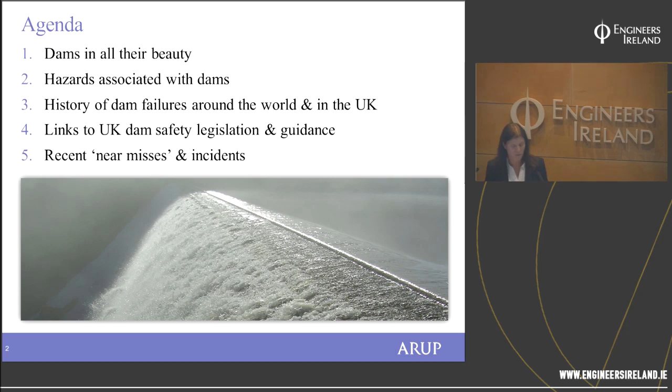So here, as I said, some of the beautiful dams - the dams that you see on a sunny day. When you see these sort of dams and you're inspecting them as a dam engineer, it makes you realise why you do the job, and it certainly is a job that I enjoy on a day like this. This is a dam in Wales that we've recently worked on and stabilised the tower, and a couple of dams in the Elan Valley. I personally think these are the most beautiful dams in the world - I may be biased, these are in the Welsh mountains, but they are certainly spectacular and beautiful dams.

So let's get into the less positive side of dams. Dams by their very nature are hazardous, they pose a threat. There are many ways that a dam may fail, or certainly start the process towards failure. Some of the most prevalent failure modes are overtopping, internal erosion, and instability. Certainly in the UK, overtopping and internal erosion probably account for about a third each of the dam failures, and you can see from my diagrams here the different ways that the failures can occur.

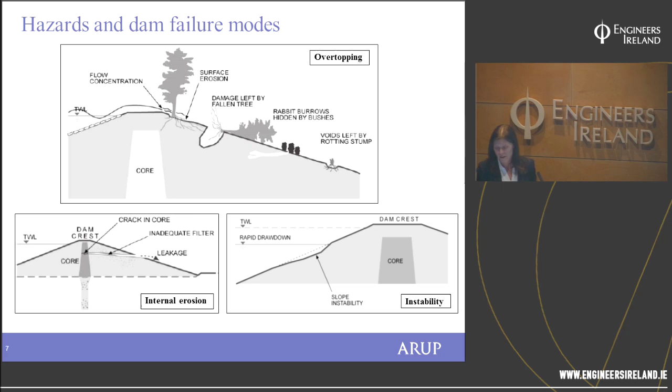With instability, there are many ways that a slope may fail. One shown on the diagram here is rapid drawdown - if you lower your reservoir too quickly, you can cause the upstream slope to fail. These are just a few of the different failure modes for embankment dams, and this is showing some of the failure modes for concrete and masonry dams, where you can get open joints in the foundations, and where your foundations aren't deep enough or there's too much uplift pressure, you may get a failure of a concrete dam.

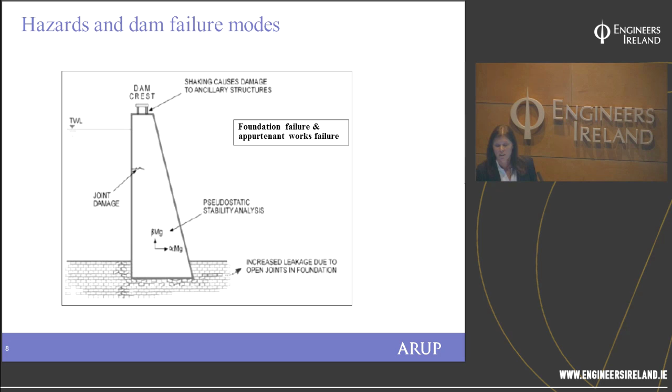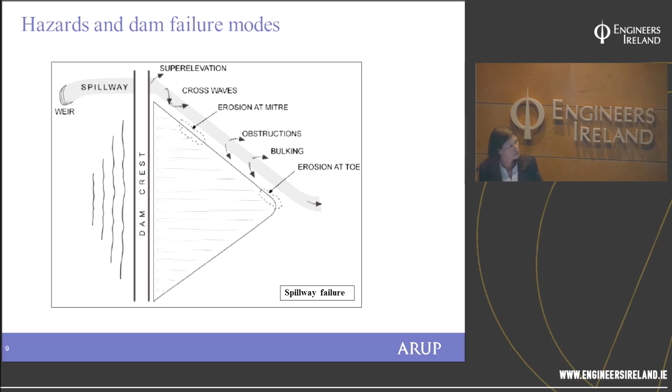And then, of course, there's the topic of my conversation later on this evening, spillway failures. With spillways, if the capacity isn't large enough to take a flood, it may overtop, and if it's close to the dam, this will cause erosion of the dam. I won't talk much more about that, as we'll cover it later.

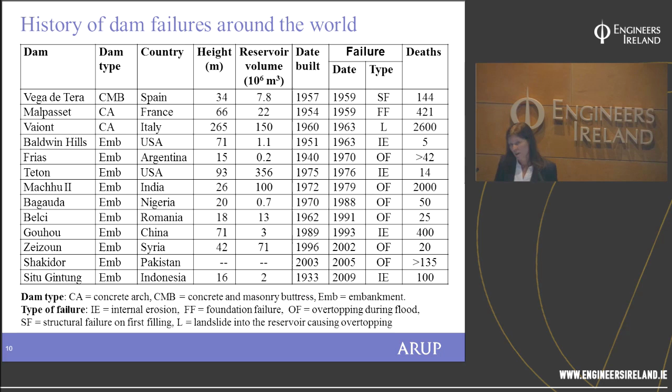Sorry, a very big table here. I'm not expecting you to take all of this in, but this is just a few of the dam failures around the world that have caused deaths and quite devastating destruction downstream when they failed. There's a couple here I'm going to talk about. You'll note Malpasset, where 421 people were killed, and Vaiont in Italy, where a horrendous catastrophe killed 2,600 people. So when a dam fails, it really is quite devastating.

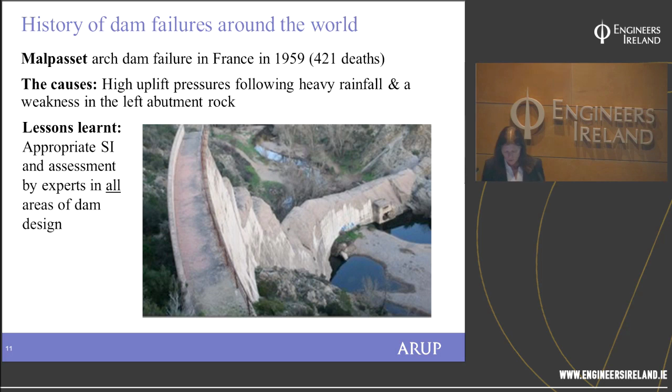This is a picture of Malpasset in France. As I said, this one killed 421 people when it failed. The causes were that this is a concrete dam, and the uplift pressures were very high during heavy rainfall, and there was a weakness in the left abutment in the rock. The key lessons learnt are that it's absolutely essential, when doing dam design, to undertake really thorough site investigation and to have experts from various disciplines working on the designs - geotechnical, hydraulic, hydrologists. One dam engineer is not an expert in all things, so it's really important to ensure everyone inputs from their specialist background.

Another very catastrophic failure was Vaiont Dam. You can see the dam down here in the valley - it's a very narrow valley, a nearly 300 metre high concrete dam. This one failed when the hillside on this side, where you can see a smooth slope, the whole hillside collapsed into the reservoir and displaced it, causing a 125 metre wave to come over the top of the dam. The dam didn't fail, as you can see it still stands today, but the reservoir overtopped and was funneled down a very narrow valley into villages below, absolutely devastating and demolishing many of the houses.

Lessons learnt from this one: although there was lots of instrumentation and surveillance on this dam, it was noted that this was a very deep-seated slip, and that the pore water pressures and the movements needed to be measured at depth as well as on the surface.

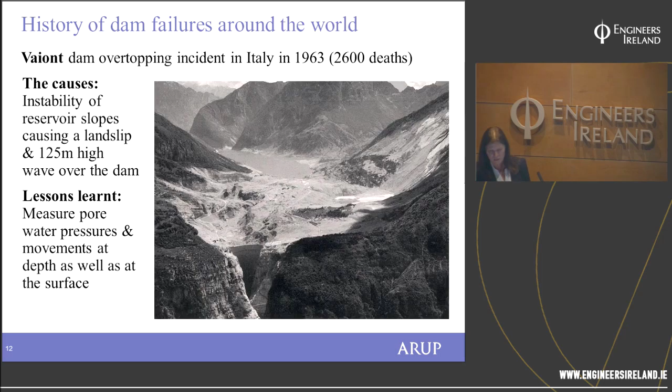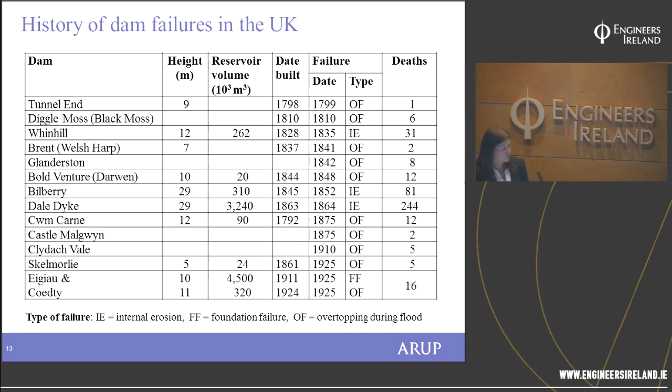Here's a few of the dam failures in the UK. There's a variety here, but one you may have heard of in particular was Dale Dyke, in the centre. This has just recently had its 150th year anniversary, and was probably the worst disaster we had in the UK, where 244 people were killed. You can see the last time we actually had a dam failure causing loss of life was back in 1925. This is Dale Dyke - it was an earth embankment dam.

The cause for this one was never absolutely confirmed, but the most likely theory was hydraulic fracture of the core. It was a very thin core with non-cohesive material on the shoulders adjacent to the core. The lessons learnt were to ensure a wide enough core with well compacted fill on either side. Another concern was the fact that there were tunnels and pipes through the dam, so the lesson was, where feasible, to place pipes in tunnels through the natural ground.

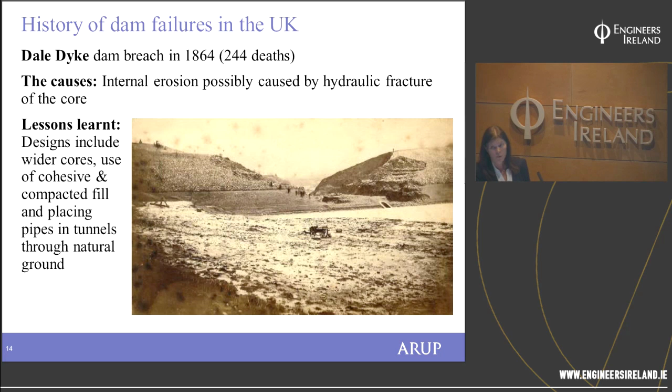As a result of these disasters, when things go wrong, we learn the lessons, and the important thing is to ensure we improve our designs and understanding, and feed these into future dam designs. As a result of Dale Dyke, specifications became common practice for fill to be worked and compacted in thinner layers - 9 inches, or 0.23 metres. This is also where tunnels started being driven through natural ground. Another lesson is that when you have a pressurised pipe through a dam, it's best practice to install an upstream valve, so you can close it and have a non-pressurised pipe through the dam - meaning if it did burst, it would not cause erosion of the dam.

Other incidents continued through the 1870s, with instances of dams leaking in the foundations as well as through the dam. This is where common practice started to have cut-off trenches below dams, and they also started to grout the foundations to seal any joints.

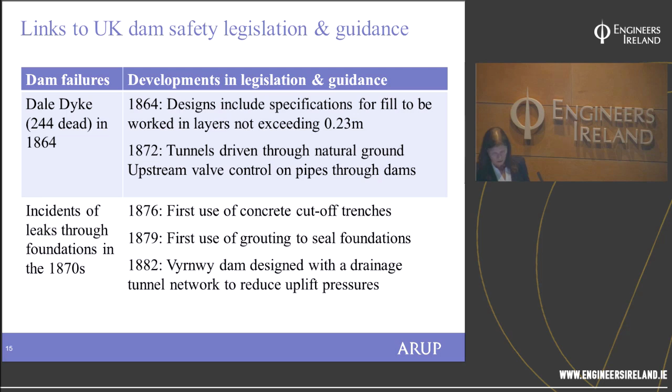This is also where dams started to have drainage installed to collect the seepage and take it safely away from the dam, and to reduce uplift pressures.

This is the last dam failure that caused deaths. These are two dams located in North Wales. Eigiau is a concrete dam which suffered a foundation failure - it was found the foundation wasn't deep enough, and its foundations burst.

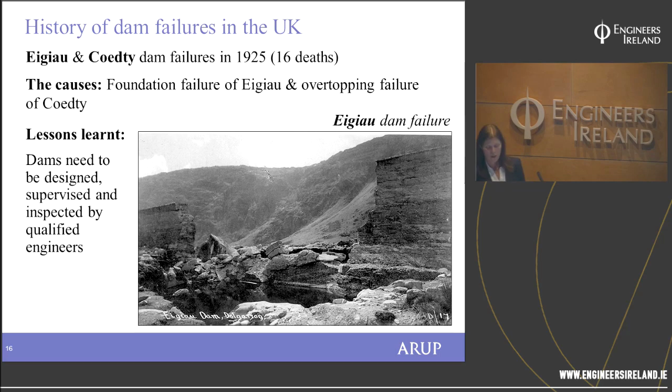The reservoir cascaded into the Coedty Dam just downstream. Coedty is an earth embankment with a concrete wall, and the fill is pretty loose material. When the Eigiau reservoir flowed into Coedty, it overtopped and eroded the downstream shoulder, and the dam collapsed, flooding downstream into the town of Dolgarrog. You can see the devastation caused just downstream.

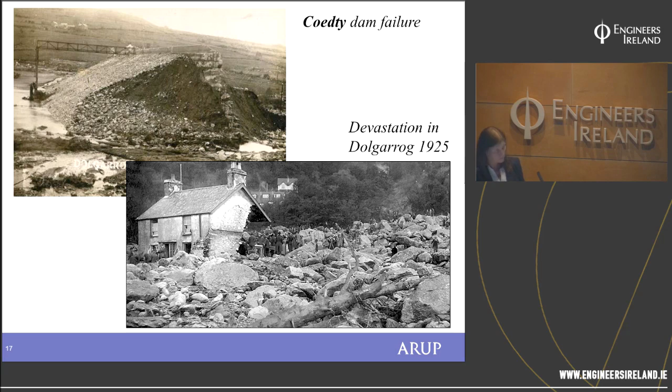After those disasters in the 1920s, the 1930 Reservoirs Act was the first piece of legislation passed to improve dam safety in the UK. That legislation required a mandatory inspection by a qualified engineer. That was as far as it went in the 1930s.

From there, there continued to be near misses, and there were major slips on three dams in 1937. A lot of that was due to improved plant and equipment enabling construction to be much faster, which had the result of increasing pore pressures, causing instability and slips in dams.

As time went on, soil mechanics became more widely used in designs, and berms were used to ensure dams were more stable. There was also wider use of drainage blankets and instrumentation to monitor pore pressures in dams.

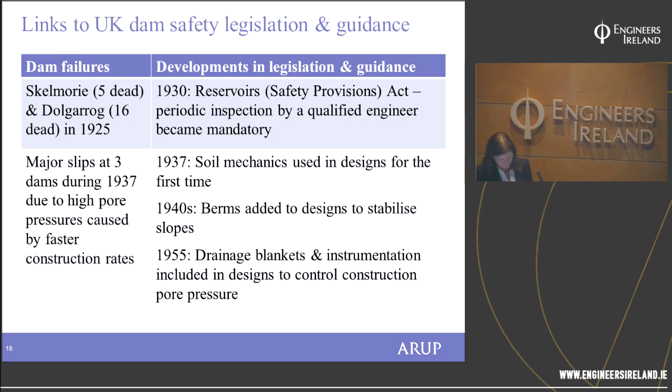However, even though there's been no loss of life in the UK since 1925, there have still been many near misses and dam failures. The average age of dams is now 115 years and growing, and there's always the question of how much longer these dams can continue. With extremes of weather and dams aging every year, the question is how much longer they will continue.

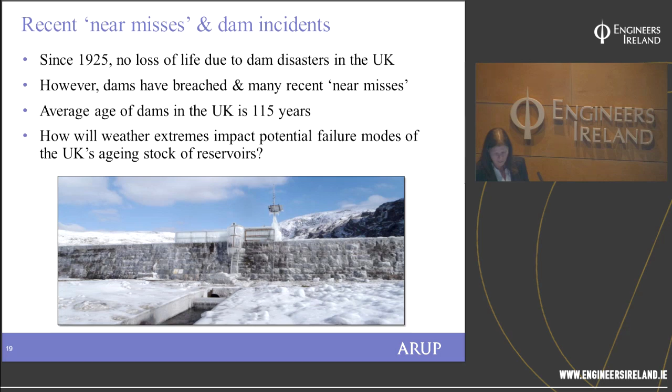This is a picture of Warmwithens in the 1970s, which failed. It had been perfectly stable for over 100 years. Then a tunnel was installed within the dam, which changed the whole behaviour of the dam. There was leakage along the line of the tunnel, and it eventually burst, as you can see. The lesson learnt is that when working on existing dams, it's really important to fully understand how remedial works can change the stresses and strains within a dam.

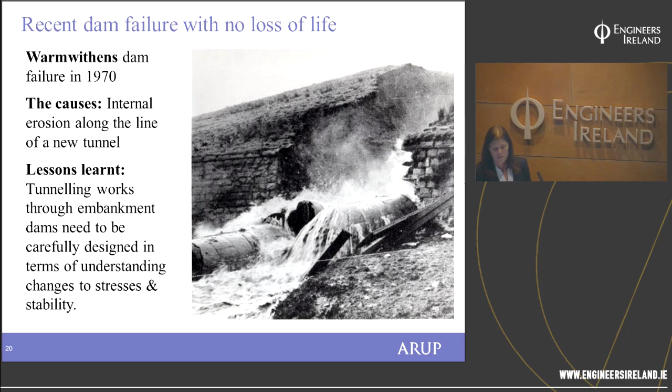As a result of Warmwithens and other incidents, the 1975 Reservoirs Act was passed, applicable to England and Wales, and various publications about managing dams during floods and other guides were published to assist with improving dam safety.

The 1975 Act was actually implemented in '86 following another dam failure, Carsington Dam, which brought in new roles for enforcement and supervision, with undertakers also having a role to play.

This is when supervising engineers inspected reservoirs twice a year, and all reservoir panel engineers inspected reservoirs every 10 years as a minimum. If this wasn't undertaken, enforcement action ensured it happened. There were other publications as well.

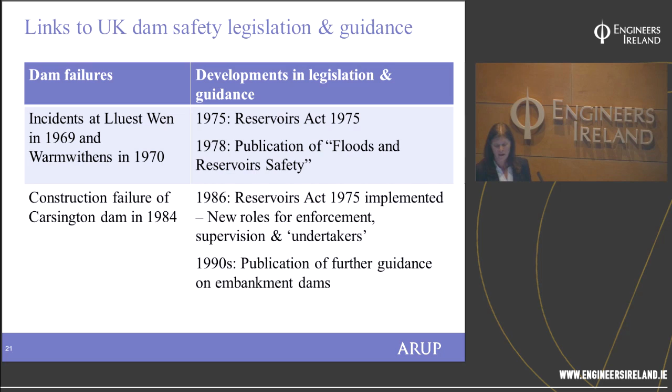This spillway was actually lower than a more modern, wider spillway, and it came into action first when the floods came in. It came into flow and was overwhelmed, causing turbulence within the channel which plucked out the masonry stones, and the walls collapsed. The dam, right adjacent, started to erode as a result.

If action hadn't been taken, the erosion would have worked backwards until the dam actually failed. This was widely publicised because just downstream there was a motorway, a very large gas pipe, and a lot of residential areas. So the residents were evacuated, and the area was put under a no-fly zone because if the dam had failed and the gas pipe had blown, it could have taken out any aircraft in the area. The motorway was closed, so it had a significant impact.

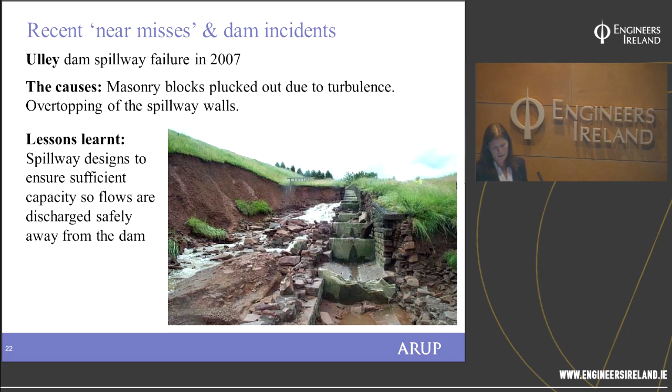They did manage to stem the erosion using excavators and fill to plug up the hole, whilst pumping out the water, and managed to get the reservoir down enough to prevent failure. So it was a fortunate and successful incident management, but it could have been very catastrophic if they hadn't caught it in time.

So after Ulley wasn't the only one - there was also a near miss at Boltby Dam where the spillway failed. Following these incidents and flooding generally across the UK, there was the Pitt Report, which recommended new legislation, and that's when the 2010 Floods and Water Management Act was passed. There was a section on reservoirs, bringing in new risk-based guidance and recommendations, one being to regulate smaller reservoirs, which has recently been implemented in Wales.

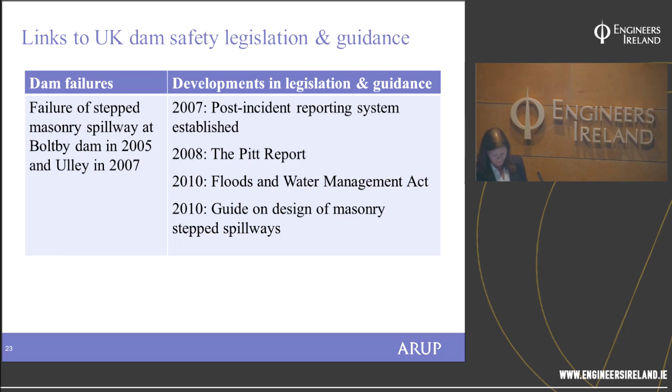For the next part of my lecture, I'd like to talk about two incidents. As I said, this is an incident in Wales when I was with Welsh Water as the dam safety manager, and Welsh Water has kindly given me permission to show you this incident and how they managed it.

This is an earth embankment dam in South Wales. Over the winter of 2012-2013 there was consistent, continuous flooding - no big extreme storms, but lots of small flood events coming through. The reservoir had been on flow for 3 or 4 months continuously, and there was water everywhere, under and all around, with the whole embankment very saturated.

Then it was early January when better weather came in and the reservoir came off flow. As it did, our reservoir keeper went up on his normal routine inspection and saw this. I was in a meeting at the time and my phone kept ringing, so I thought I'd better take it. My engineer said I think you need to look at the photographs I've just sent you - and this is what he showed me. As soon as I saw them, we kicked into action.

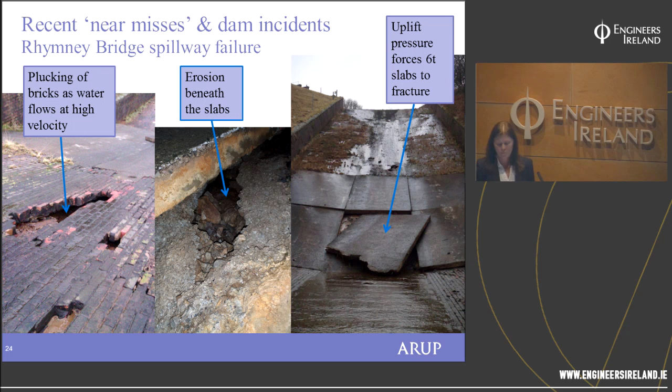The issue was we're in the middle of winter, and if that reservoir overflowed again we could lose more of the spillway to the point where it unravels and starts eroding the dam itself, right adjacent to it. So we immediately started work repairing the spillway, but we were at high altitude with extremely difficult weather conditions - this was now end of January and we had an unprecedented amount of snow. We used a system called bronze, silver and gold.

Depending on the level of the incident, bronze is a local event, silver is a regional event, and gold is your highest level event. So we declared a gold incident, and we had our highest level people in our gold command, in our room in Cardiff, away from the site.

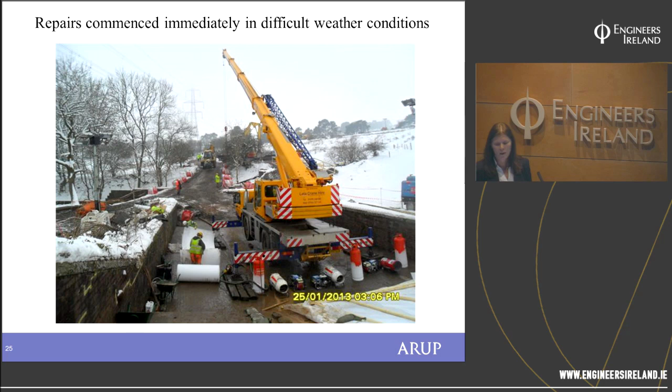So I was sat in gold command for 6 weeks while this was going on, and we were continuously watching the weather forecast and planning for the worst. This was them working away. They had to install concrete in this weather, so we had blankets and hot air blowers and everything going, and quickset concrete to try to enable us to make these repairs. But it was slow going. We were working 24/7.

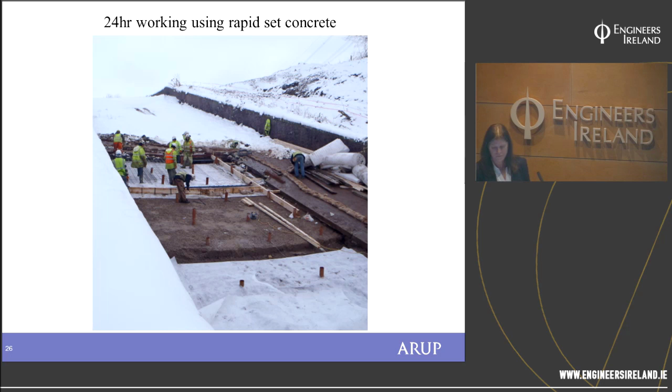We had high volume pumps, the biggest pumps you can find in the UK. They're the ones that the emergency services have, and we managed to find 4 in the whole of the country. We got these to site, and they were going full bore all the time, trying to keep the reservoir down. As I said earlier, you have to manage your reservoir level so it doesn't drop too quickly and cause an upstream failure.

So we had people monitoring the dam while we drew the reservoir down. Our aim was to get it as empty as we could while all these works were going on, to provide flood storage in case another storm came in. You can see there one of my technicians operating one of the valves in pretty difficult conditions.

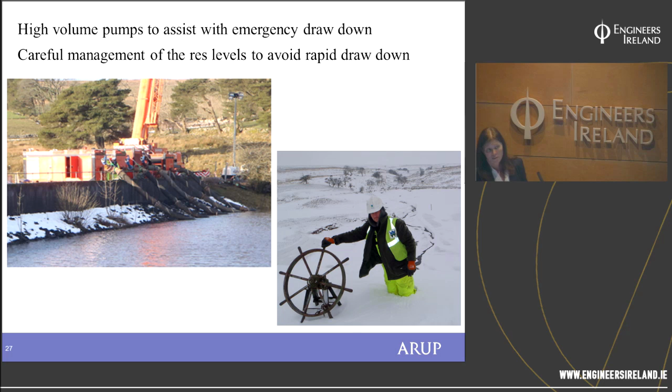While we were undertaking these repairs, we had lots of contingency measures going on. On one side of the reservoir we were digging a channel, so in the worst case scenario that the reservoir overtopped again, the plan was to dig a notch out of the side of the reservoir and allow water to go down away from the dam, so it didn't erode any of the dam. We had the excavator on standby ready to take that notch out if necessary.

We had CCTV cameras patched into Gold Command, and that's where all the decisions were being made, while we continuously had briefings every 2 or 3 hours, depending on what was going on site, to make sure we all had the same information.

And while this was all going on, it was, I can see it there, yes, on the 25th of January, they forecasted a very large storm coming in. At that point we had half of the spillway completed, and the other half was just blinded with concrete.

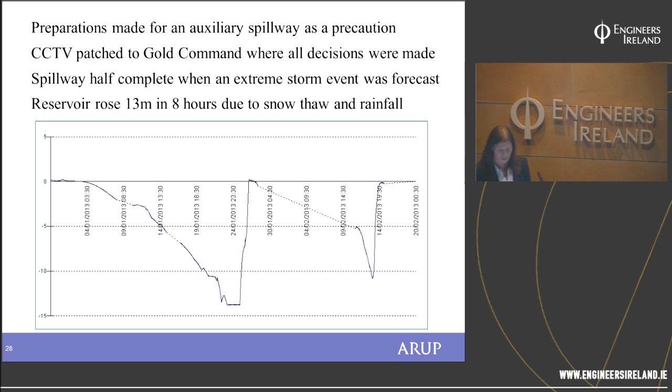As always happens, it happened at 4 o'clock in the morning in dreadful weather conditions, but we had got all the contingencies in place.

We'd stockpiled sandbags in case there had been any erosion and overtopping, where we'd have placed the sandbags in the eroded holes. There was staff and excavators at the ready to take out the notch I mentioned, to hopefully take the flow of water away from the dam.

We'd notified the local resilience forums and had evacuation plans in place. At this point we hadn't evacuated, but we had everything ready to go, and we could have evacuated very quickly.

While all that was happening, we just had to watch and wait and monitor the spillway to see what happened. Fortunately, thanks to some very good planning, the repairs held.

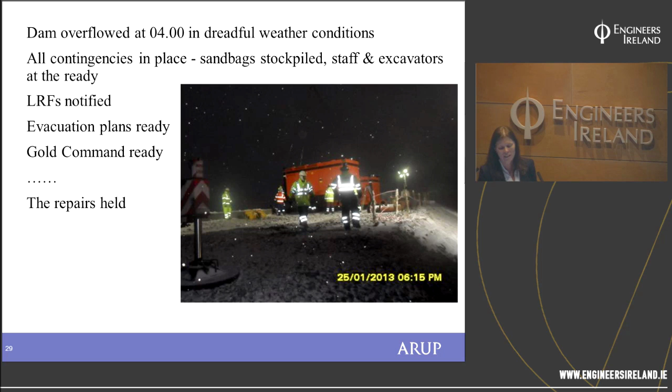So that was a successful story, and a lot of lessons learned.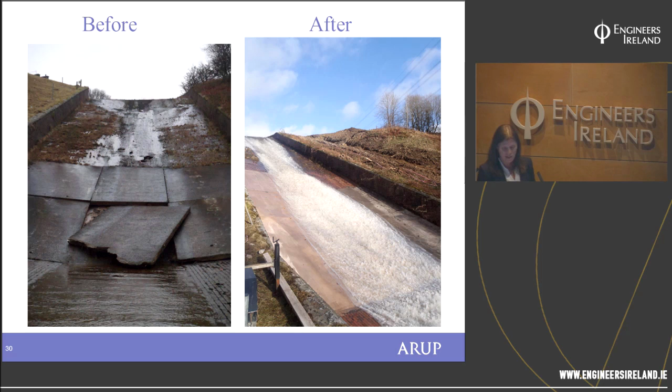I wanted to compare this to the Oroville Dam spillway failure, as it's quite topical. You may have seen videos and photos going around on the internet, and I've managed to download some photographs. The owner, the Californian Water Resources, have been very open and shared a lot of information online. I should mention I've taken a lot of this off the internet, so it isn't my own personal knowledge, but I wanted to show you the scenario that can happen at a very high dam. This dam is 235 metres tall, located just north of Sacramento in the United States.

You can see the main spillway in the middle, and this is the dam here. There's an area of land away from the dam, with the main dam over on the right side. This line here is what they call the auxiliary spillway, or emergency spillway, which is leveled just slightly higher than the main spillway, so it comes into play after the main spillway.

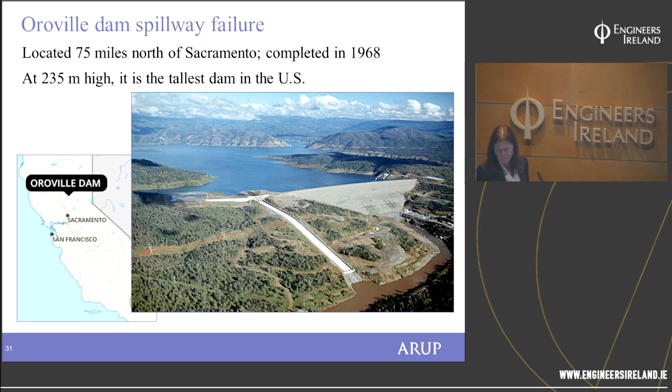In early January this year, a series of storms, similar to Rumney Bridge, brought ongoing bombardment with lots of runoff, and the reservoir filled to the point where they needed to open the spillway gates. You can still see the spillway gates at the top. They opened the gates and let the flow through the spillway. The flows increased, and one of the inspectors went up and saw some of the damage, so they closed the gates — and this is what they saw when they closed the gates.

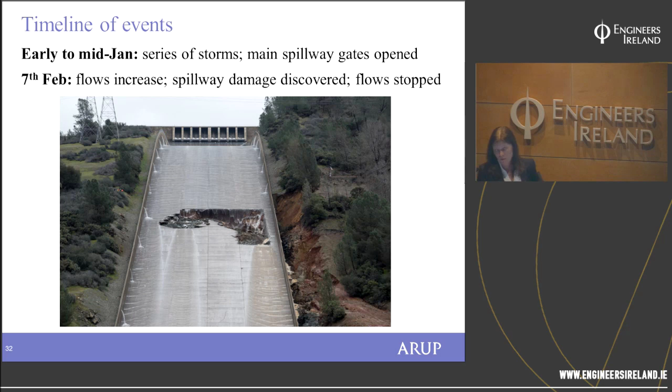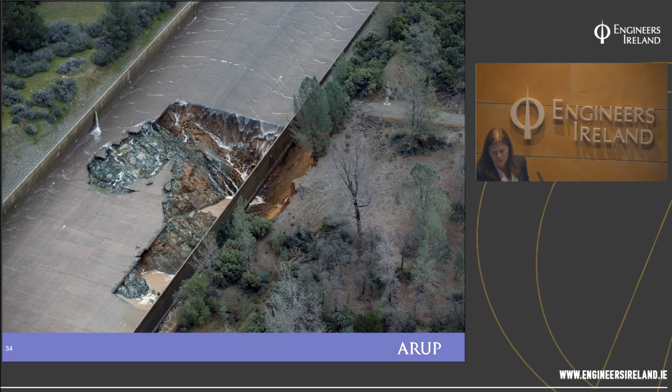I think that probably tells the story in itself. You can see the people there, which gives you the scale of the hole that's eroded. The interesting thing to note — I'll come to the theories of why it happened later — is that the original failure is along the line of a joint in the concrete, with a big void underneath the spillway. You can see the side of the hill starting to erode, and the wall is literally balancing over that big void at the moment.

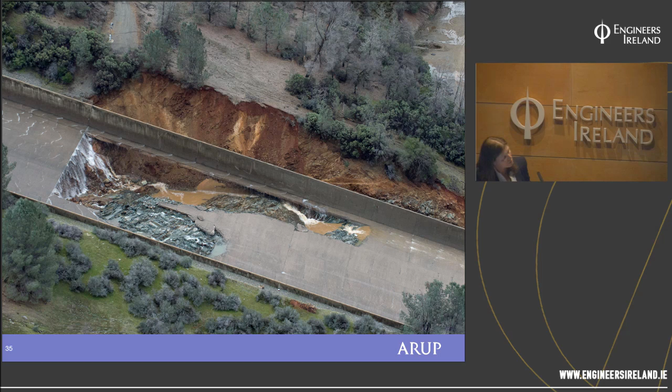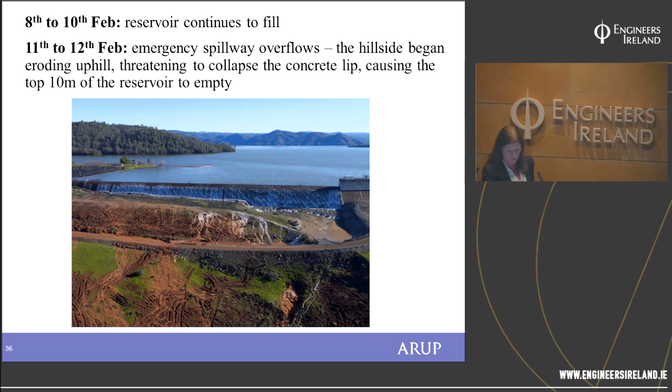Unfortunately, the runoff continued and the storms didn't let up, so the reservoir kept filling until the emergency spillway started overflowing. The emergency spillway is just a 10-metre high concrete lip, and everything downstream of that is natural ground. As the flows came over, the hillside started eroding. Note the road just downstream of the spillway — you can see it starting to erode. Note that road again, and this is what happened: it basically took out the road and eroded a seriously big hole on that side.

The main concern is that with the backward erosion, if it had continued, the 10-metre high concrete lip would have eventually undermined and collapsed, and that would have been like a dam failure on its own. Even without the dam failing, that 10-metre high wall of water over that area of reservoir rushing down the valley would probably have caused one of the worst disasters in the United States — worse than any of the dam failures they've experienced before.

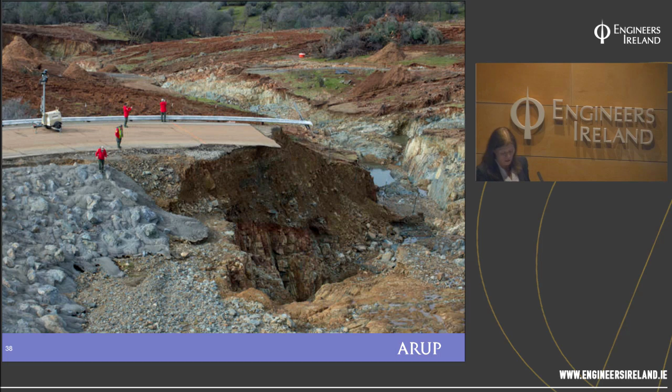So they had to open the main spillway again. Even though the main spillway was out of action or seriously damaged, they had no choice but to bring it back into flow. While that was happening, they got their crews in and started repairing the auxiliary spillway.

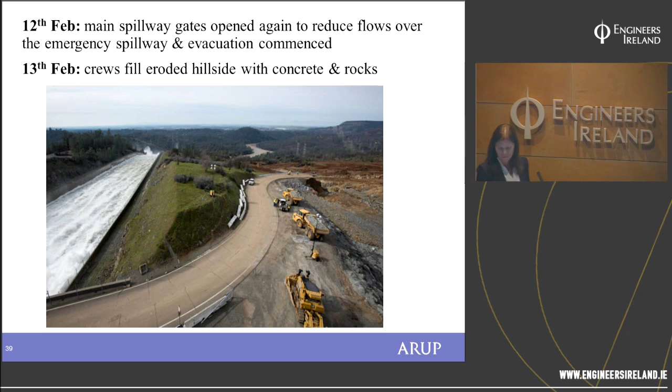This is them pumping in concrete and placing rocks. Whilst that's happening, this is what's going on with the main spillway — there's going to be more erosion and turbulence in the area where that hole was, and you can see it starting to erode quite severely on the hillside. You can also see the spoil heap at the bottom where all the debris is being washed.

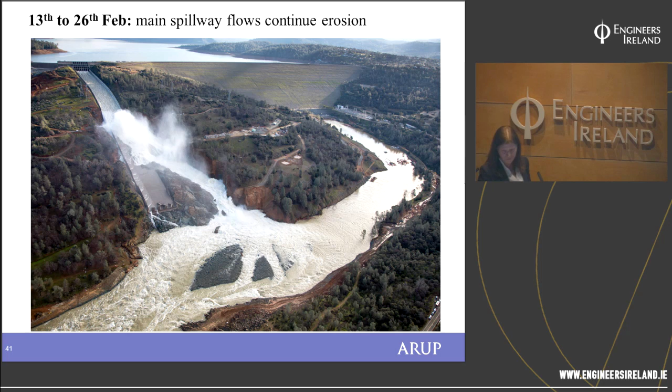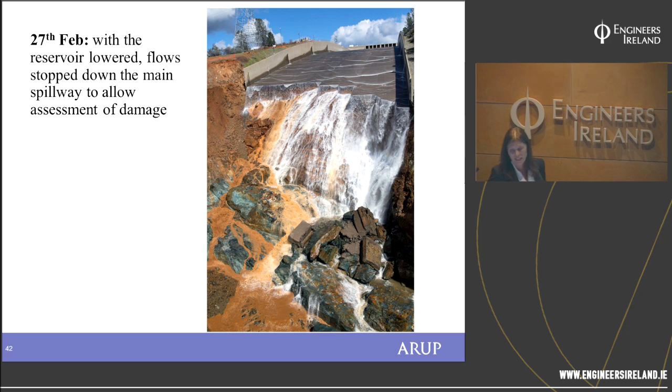Eventually the reservoir lowered significantly enough that they were able to close the spillway gates again and get in there to do an assessment of the damage. This is what they see — so now they've got even more significant damage.

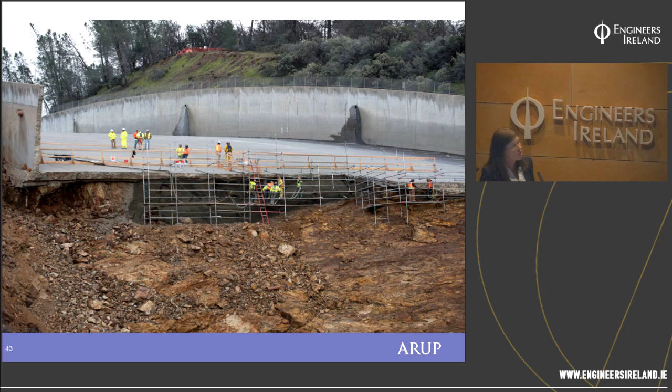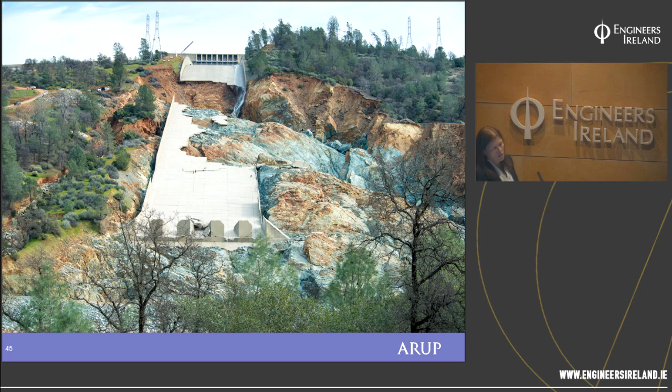You can see there the walls with the reinforcement twisted. It just shows you the power, as I said, the power of water. And there's the damage to the whole of the hillside on the other side, and the hole obviously has got rather much larger.

This is the debris field at the bottom. You can see there it started to completely fill up the river channel at the base.

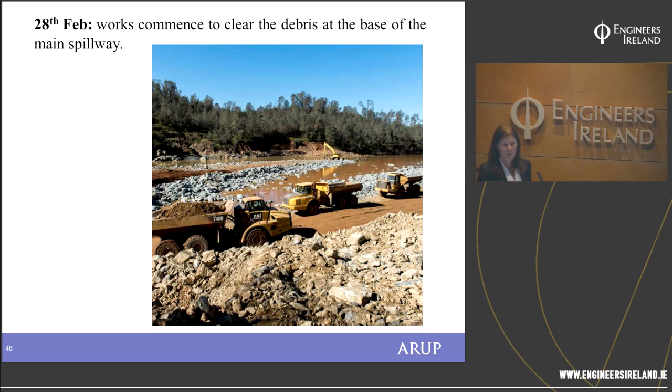So then, late February, they started working on clearing that debris field. One of the main aims was they wanted to clear it enough that they could actually bring the hydroelectric plant back online, because that in itself would then draw off some of the water from the reservoir. And they worked through the night. You can see the pictures there, the base.

So currently, what I forgot to mention is, when the auxiliary spillway did start eroding, they evacuated nearly 200,000 people from downstream. But now that they've done some of their repairs on that side of the hill, they've allowed the people to return to their houses, and they're continuing to clear out the debris from the river channel. They've managed to bring back online the hydroelectric plant, and that is assisting with keeping the reservoir level down.

So while they're now hopefully out of the stormy season, although that's not for certain, they are continuing to do an awful lot of repair work, and they need to have all the repairs completed before the next rainy season. So they've got an awful lot of work ahead of them. It was reported on the internet that they estimated about $200 million has been spent already, but that's just a drop in the ocean of what they've got to do still.

So it does show you how costly these incidents can be.

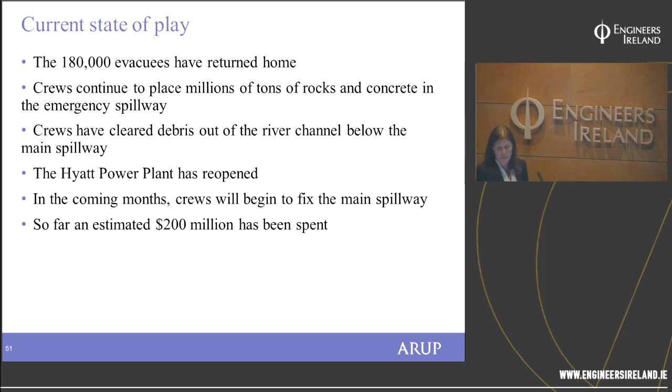The theories that are being discussed online about why the dam failed, as I said, these are early days. The investigations haven't been completed, and this isn't a fact, but there's people talking about the fact it was caused by cavitation. This can happen when you have defects in a spillway, and the water becomes turbulent and causes air bubbles, and as they collapse, they can have an extremely powerful force which break open the concrete.

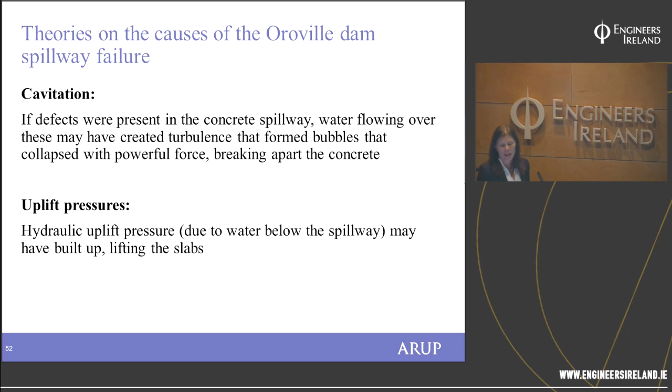Another theory is about uplift pressures. I mentioned in Rhymney Bridge too that was the main cause of the Rhymney failure, where you've got a significant amount of hydrostatic pressure underneath your slab, and that can force up the slabs and break them in that manner.

And then another potential cause is internal erosion. You recall I showed you where the line of the failure was along a joint of one of the concrete slabs. So if you lose the sealant between the slabs, water can go down in between the slabs and start eroding the soil underneath the spillway. And then your slabs may collapse due to the voids underneath the spillway.

But to be honest, sometimes it's very difficult to say exactly what does happen, and quite often it is usually a combination of a number of different factors.

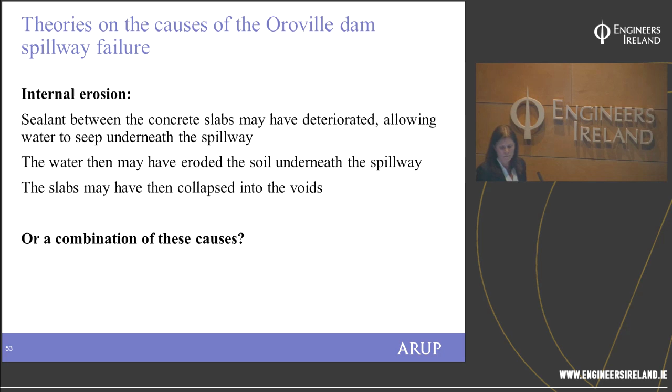So lessons learned with regards to spillways is that ongoing timely maintenance and monitoring of spillway channels is absolutely essential, as it is for the dams in general. But the most important thing is when you see defects, such as missing joint sealant or bricks and masonry plucked out, is to replace it as soon as reasonably possible.

And absolutely as essential as well is to ensure the maintenance of your underdrains and ensure that your pressure relief drainage is functioning, so ensure that they're not overwhelmed, they're kept clear, and that they're flowing properly.

Quite often we say to people, like we say to the reservoir keepers, that if they see an increase in flow in the drains, they should raise the alarm. But also, equally as important, if they see no flow when you'd normally expect a flow, that's a sign that you may have blocked drains. So it's absolutely vital that those are cleared.

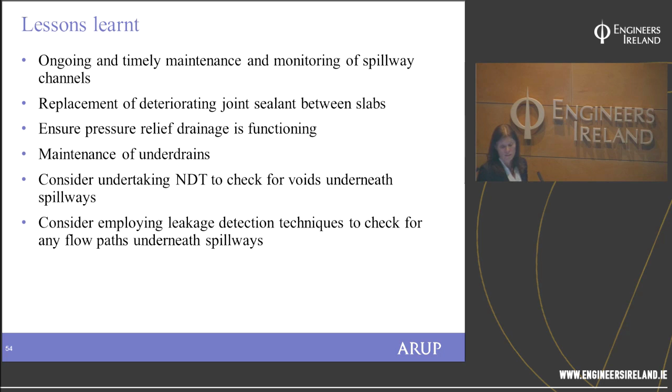And other ways, if you're concerned about leakage or voids under your spillways, there are non-destructive techniques that you can use to check for voids under your spillway and to check for leakage.